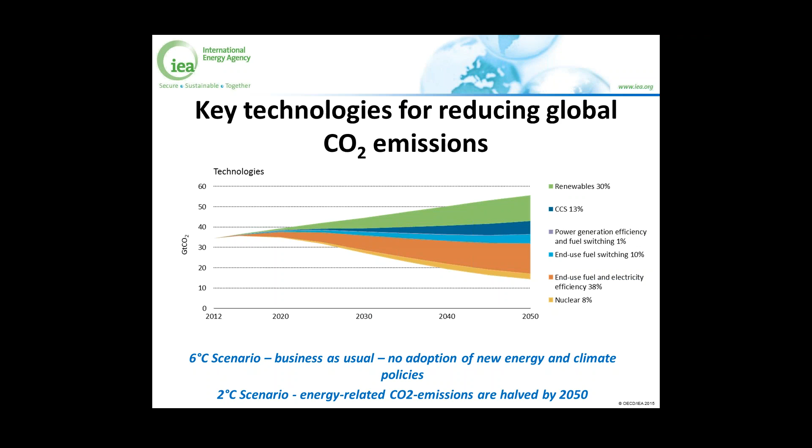For this, we have a kind of standardized IEA roadmap process. We normally start with engaging stakeholders to get the expertise we might not have, which we acquire during the roadmap process. Then we identify a baseline: where is the technology today, what are today's costs, what are today's efficiencies? Then we establish a vision: what is the deployment path needed to achieve the 2050 goals outlined in the ETP scenarios? And then we identify technical, regulatory, policy, financial, and public acceptance barriers which need to be tackled. Finally, we provide some action items for stakeholders to overcome those barriers.

So now I'm actually starting with providing you much more insights from our analysis.

First some remarks. Hydrogen fuel cells are a very broad topic. It covers energy supply and different energy demand sectors. It includes a lot of technologies and applications. And actually the benefits of hydrogen and fuel cell technologies can only be evaluated from an integrated point of view.

I can already say with certitude that we won't have the time to cover all this in the webinar. So that's why I'll pick some of the most interesting applications which we think offer the greatest value proposition of hydrogen and fuel cell applications. And I'll use these examples to sketch the most important barriers, as well as the actions which can be taken to overcome these barriers.

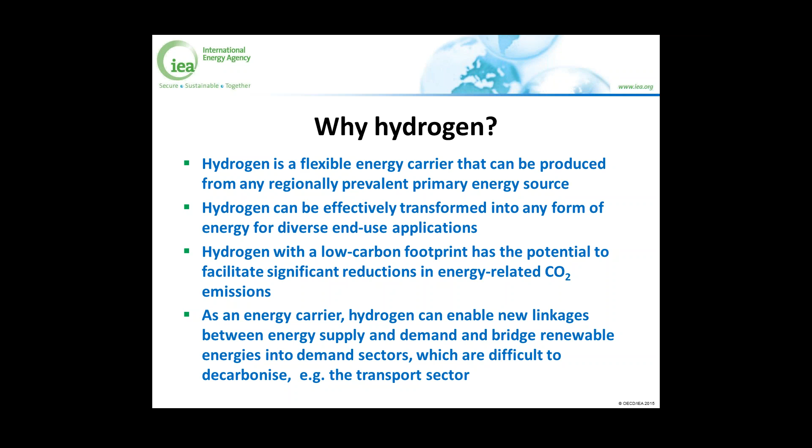But in addition, hydrogen can enable new linkages between energy supply and demand, and bridge renewable energies into demand sectors which are actually difficult to decarbonize, for example the transport sector. So as I just said, hydrogen can facilitate the deployment of low carbon energy.

In such a 2-degree scenario, in such a 2-degree world, energy supply needs to rely on variable renewables to a large extent. And this also means that supply cannot be modulated that easily to follow energy demand, because wind and sun cannot be controlled. But this also means that in turn, such a low carbon energy system is much less flexible.

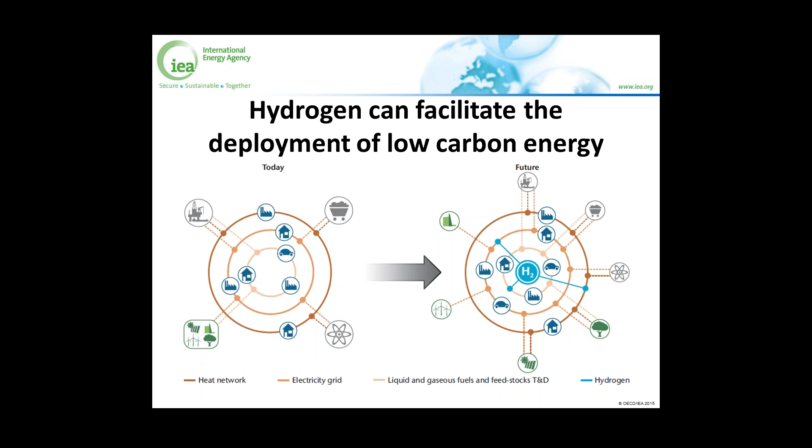One of the key aspects is that hydrogen is an energy carrier which can store low carbon footprint energy. This characteristic of being able to store low carbon energy at a sufficient energy density, for example, to make it possible to have a 500 or 600 kilometer range with a fuel cell electric vehicle, is something very special, and this makes it pretty unique compared to electricity.

Small quantities of hydrogen can be stored under weight and space requirement, and large quantities of hydrogen can be stored over long periods of time. This could facilitate the integration of very large shares of variable renewable energies into the energy system.

In addition to this, hydrogen could also be used as a feedstock. This is how hydrogen is used mainly today - not as an energy carrier, but as a feedstock. Hydrogen will also be demanded in the future as a feedstock, for example in the refining industry, especially against the background of diminishing oil quality. Much more hydrogen will be needed to actually produce the high quality fuels which we demand.

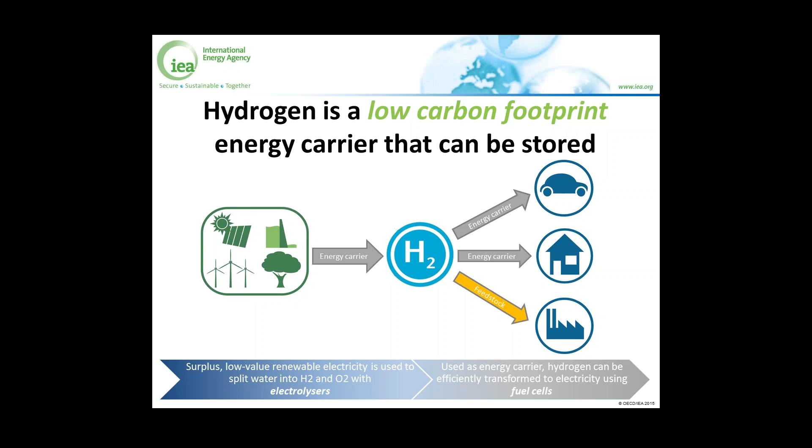Now we'll have a look at some more concrete applications. For this we will start with hydrogen and fuel cell technologies in transport.

So basically, in the transport sector, there are 3 technological options to decarbonize individual motorized transport from a technology perspective. You can have battery electric vehicles and the direct use of low carbon electricity. You can have hybrid vehicles and plug-in hybrids in combination with the use of liquid fuels which have a high blend share of sustainable biofuels. Or, finally, you could use fuel cell electric vehicles and hydrogen.

Each of these technology options has its specific advantages and disadvantages. For example, battery electric vehicles are much likely to be always restricted in terms of range. And even if the range could be enhanced substantially, there's still the barrier of how to get the electricity into the battery and what time this would need. So recharging time is actually a serious issue.

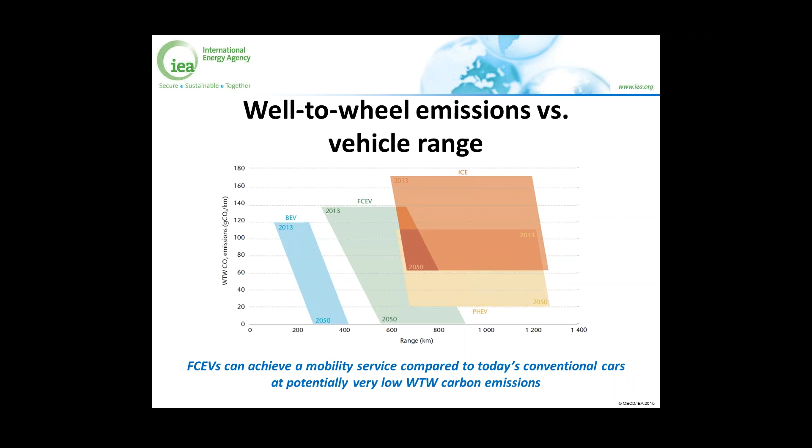Which is why we were looking into some more detail in the transport sector. We were investigating the effect of a much more intensified use of fuel cell electric vehicles on energy use, emissions, and costs. So we developed a variant of our normal 2-degree scenario, which is the 2-degree high hydrogen scenario.

EU4 is a little bit an artifact, due to our aggregation of regions already in the model. So EU4 comprises France, Germany, Italy, and the UK. Why are we looking at these 3 regions only? Because if you want to seriously investigate hydrogen in transport, you need to introduce some spatial resolution in models, and this is always very complicated.

Therefore, we decided to focus on the key regions where we already see today a lot of hydrogen development, which doesn't mean that there aren't other regions which also develop a lot of fuel cell and hydrogen technologies, namely Korea, and other countries in Europe not comprised in this EU4 region.

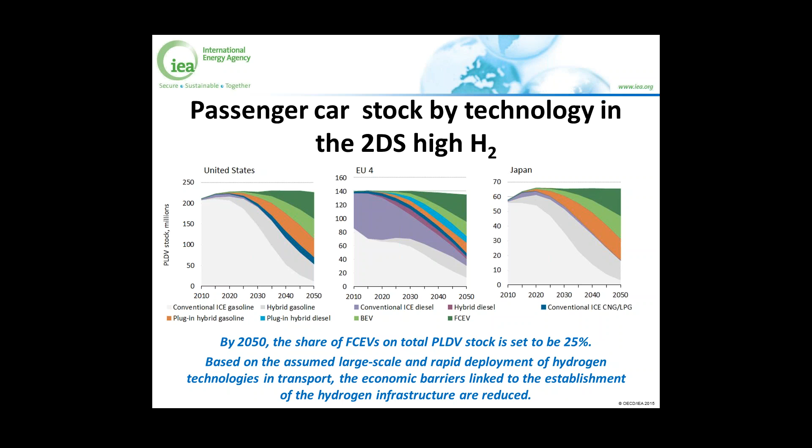In ETP, we use the avoid, shift, improve concept to build our 2-degree scenario for transport. Avoiding transport means the transport activity is reduced, which can be achieved for example by better urban planning. Shifting transport means transport demand is shifted to more efficient modes, for example individual motorized transport shifted to rail or bus.

And finally, improving transport technologies includes the deployment of high-efficient conventional vehicles, the uptake of alternative powertrains, for example fuel cell electric vehicles, and also switching to alternative fuels like biofuels.

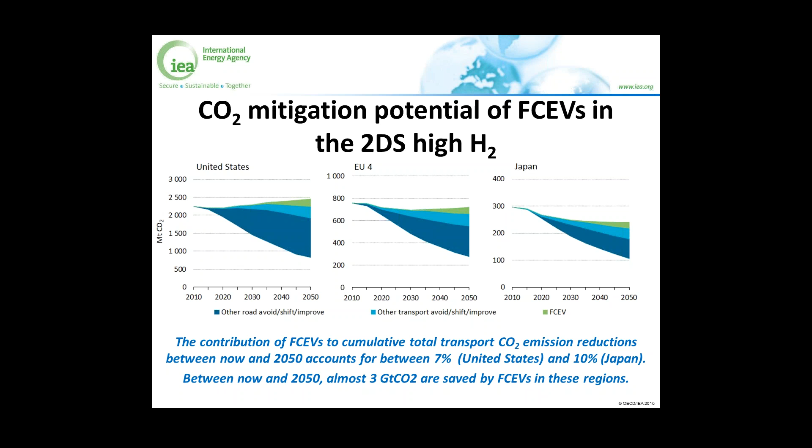This actually sounds not that much, but you need to take into account that we are talking about the whole transport sector — shipping, aviation, rail, and road. So achieving a 10% contribution to the total emission reduction is actually quite a large share. In total, this translates to almost 3 gigatons of CO2, which could be saved by fuel cell electric vehicles between now and 2050.

This sounds all wonderful, but why don't we have fuel cell electric vehicles then? On the one side, fuel cell electric vehicles are still pretty expensive, and so far only very few models are available on the market.

On the other side, the absence of the hydrogen generation, transmission, distribution, and retail network is an important barrier. To really make fuel cell electric vehicles an option, large amounts of infrastructure need to be built from scratch — thousands of stations, thousands of kilometers of pipelines, and a lot of trucks to distribute the hydrogen from the production site to the demand side.

In addition to this, there's also some uncertainty. Will fuel cell electric vehicles be accepted by the market, and how fast can the market actually ramp up? Especially in this nexus between building up the infrastructure and rolling out the vehicles, this uncertainty plays quite a crucial role. Let's look at the example of such a hydrogen refueling station.

What this stylized graph is showing is the cumulative cash flow curve of a hydrogen station over time.

What you see is that over a pretty long time, there might be negative cash flow. This negative cash flow is caused by actually pretty expensive equipment and low utilization in the very beginning. These are actually the two main barriers.

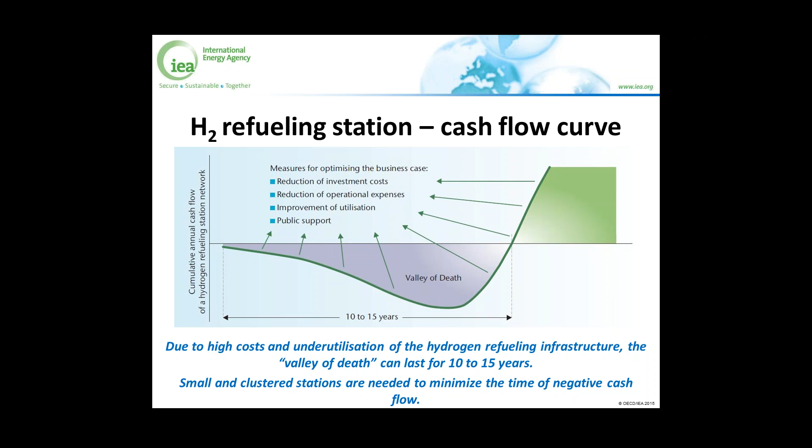Which is the theme of our next slide. So smart planning is not sufficient to make fuel cell electric vehicles an attractive option to the consumer. The rollout of this new technology would need proactive intervention.

So what we are actually doing is trying to estimate the amount of, let's call it subsidies, which would be necessary to make fuel cell electric vehicles cost competitive with efficient gasoline cars. This is also very important to note: it needs to be compared to efficient gasoline cars. We need to stay in one and the same scenario. The efficient gasoline cars in 2050 will not be the gasoline car of today.

So therefore, we were basically calculating total costs of driving. The total cost of driving comprises the investment cost of the vehicle plus the lifetime fuel cost of the vehicle, and this is all normalized to the lifetime mileage of the vehicle. So basically, we get a US dollar cent value per kilometer.

And we were comparing these total costs of driving with conventional but efficient gasoline vehicles. Then we were calculating the amount of money which would be needed to make fuel cell electric vehicles cost competitive with efficient gasoline vehicles. So basically, on this economic metric, you can compare the economic feasibility or economic performance of different technology options.

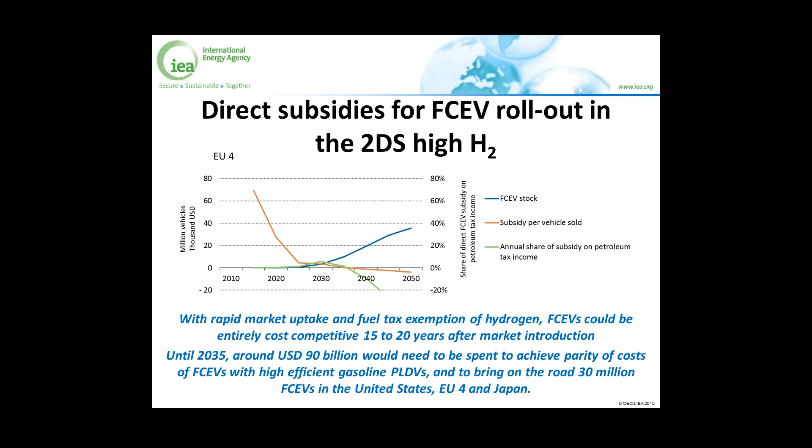That's it so far for our transport results, and now I'm talking a little more about hydrogen and fuel cells for variable renewable energy integration.

In our 2-degree scenario, the decarbonization of the power sector is one of the main pillars to achieve the 2-degree target. So until 2050, global average carbon intensity of power needs to drop to around 40 grams of CO2 per kilowatt hour, from around 530 grams of CO2 per kilowatt hour today. So we really need a massive decarbonization of the power sector.

But this also means that the share of variable renewable power in the electricity mix needs to reach up to almost 45% in some regions, for example, in the EU.

As power supply and demand needs to be balanced instantaneously and everywhere in the power grid, this high share of variable renewable penetration might result in significant temporal and geographical imbalances between power supply and demand. This might result in significant amounts of renewable power being curtailed, because if renewable power cannot be absorbed by the power grid, then normally the wind farm will just be switched off.

So this high penetration of variable renewable power in the electricity mix could also be a source of a significant amount of electricity which could come at low price. But it's important to note we are talking about the price—the surplus renewable electricity has a very low market value, but it is produced at the same cost. So this is not free electricity, it is just low-value electricity.

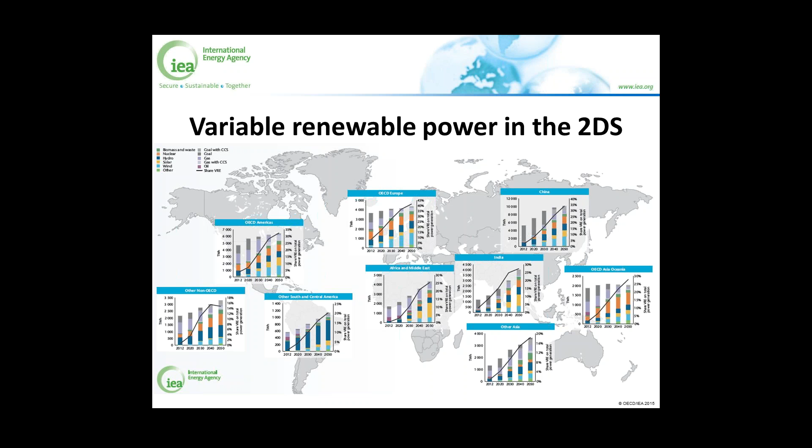Now, hydrogen-based systems could actually establish new energy vectors to integrate surplus variable renewable power into the energy system—or reintroduce it, maybe that's the better term. We can call these power-to-X trajectories. These trajectories comprise power-to-power: renewable electricity is transformed into hydrogen via electrolysis.

It is stored, or can be stored, and then retransformed to electricity via fuel cells. This way, large amounts of renewable power could be stored.

We also have the power-to-gas trajectory: renewable power is transformed into hydrogen, which is then mixed with natural gas—this is what we call blending—or transformed into synthetic methane with the help of a methanation process. This way, renewable hydrogen could be integrated into already existing transmission and distribution infrastructure, the natural gas grid, which already exists in a lot of countries, and it can also be used with existing end-use conversion technologies such as gas turbines, for example, for power generation.

And then, as a third trajectory, we look into the power-to-fuel trajectory. Renewable electricity is transformed into hydrogen and then sold as a transport fuel to be used in fuel cell electric vehicles. What is important to note, and this is the main content of this slide—

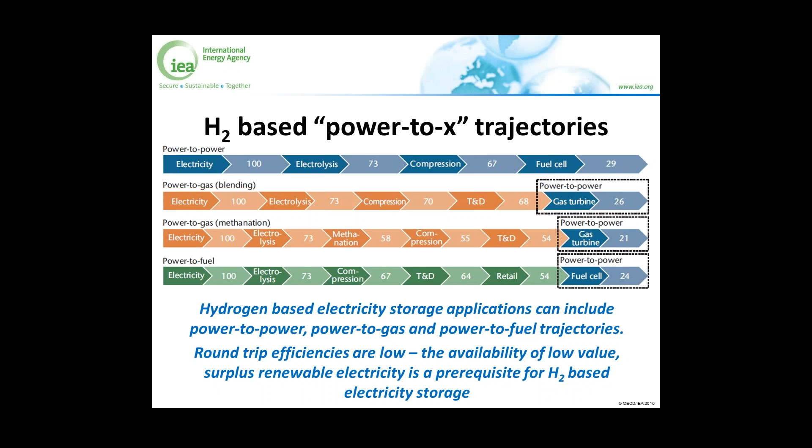And to make it even more complicated, you actually need some kind of spatial resolution to account for, let's say, transmission grid bottlenecks and stuff like this. So this is a very difficult task, and I try to formulate this in this roadmap: without a robust quantification of this potential of surplus electricity, it is very hard to discuss hydrogen technologies.

We were looking a little bit into the electricity storage potential in the 2-degree scenario. Why are we doing this? Because power-to-power storage systems would be a means to store electricity, and electricity storage is already used today.

Our estimates with our modeling tools come to the result that by 2050, in a 2-degree scenario, this electricity storage capacity might be quadrupled. It's important to note that this might be a conservative estimate, because our modeling approach only captures time-wise mismatch, not geographical mismatch. These geographical bottlenecks, the transmission line bottlenecks, might be very important when evaluating the need for electricity storage.

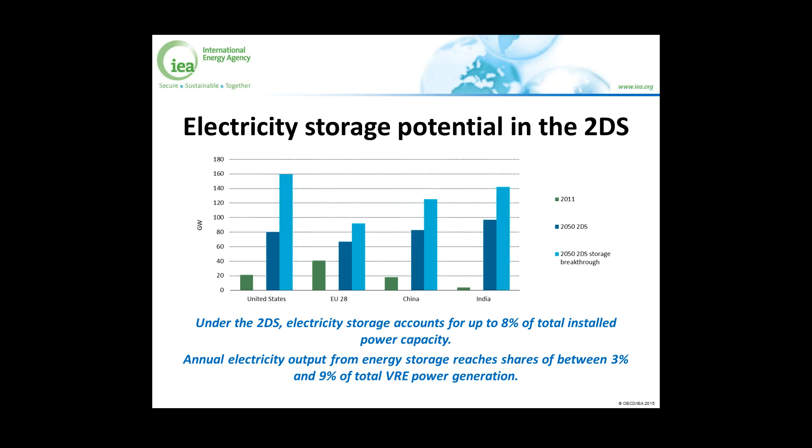Discharge duration can be in the region of seconds and minutes if you're talking about voltage regulation, but it can also comprise storage for weeks or even seasons. Here we are talking about large-scale, long-term energy storage.

Hydrogen could possibly find its place within large-scale, long-term energy storage applications. In fact, it might be the only storage option which could provide acceptable levelized costs of electricity if we look at large-scale and long-term energy storage.

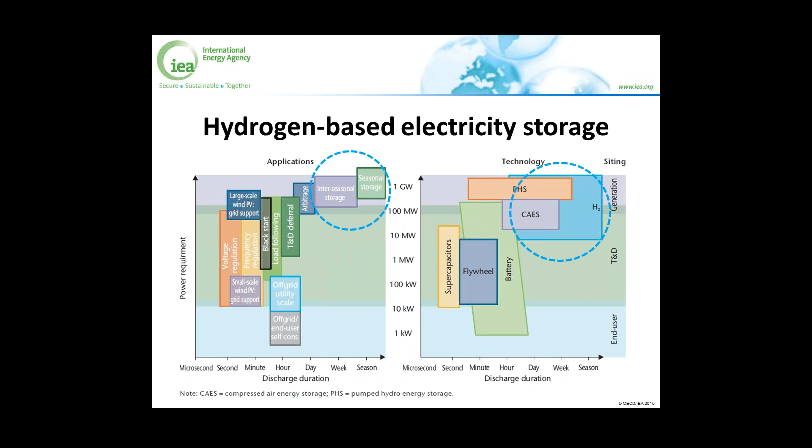All these large-scale, long-term energy storage systems suffer from very low annual utilization rates. Pumped hydro, but also compressed air storage, are looking not so promising here. Because hydrogen is much more energy dense than these two competitors, hydrogen might really be the option to cover this segment.

Finally, we wanted to know what hydrogen-based renewable power integration pathway could offer the highest value proposition. Is it power to power? Would it be power to gas or power to fuel? What we were doing here was calculating the marginal abatement costs of these three options.

It looks like in the more distant future, the power to fuel pathway achieves the lowest marginal abatement costs, getting as low as $20 per ton of CO2 to $150 per ton of CO2. This is mainly due to the fact that the transport sector is difficult to decarbonize, and all other decarbonization options are expensive as well. Plus, if fuel cell electric vehicles are produced at large scale, there seems to be huge potential for cost reductions for fuel cells. This is why, in this comparison, the power to fuel option seems most promising.

If we look at power to power, it seems like this technology could also become an attractive decarbonization option. Our calculated marginal abatement costs are in the range of $100 to $200 per ton of CO2. Given that we have around $150 per ton of CO2 in our ETP model in the 2-degree scenario by 2050, the power-to-power storage option could actually also be interesting.

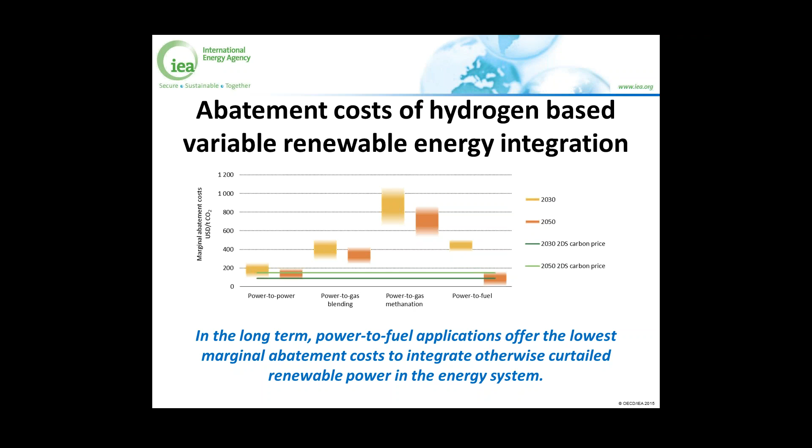I'll say some very few words about hydrogen and fuel cell technology in industry and buildings. Basically, low carbon hydrogen can be a means to reduce upstream emissions in liquid fuel production processes, as I already said at the beginning. In the steel industry, the more efficient use of hydrogen has the potential to contribute to significant CO2 emission reductions.

It can also play an enabling role for the application of CCS technologies. The use of renewable hydrogen in industry hinges upon its economic competitiveness, particularly when compared to hydrogen from natural gas steam methane reformation with carbon capture and storage. In the building sector, natural gas-fueled fuel cell micro-CHP systems could help increase efficiency, but they struggle with costs. So there are opportunities in industry and buildings, but we do not expect them to be the main driver for hydrogen and fuel cell development.

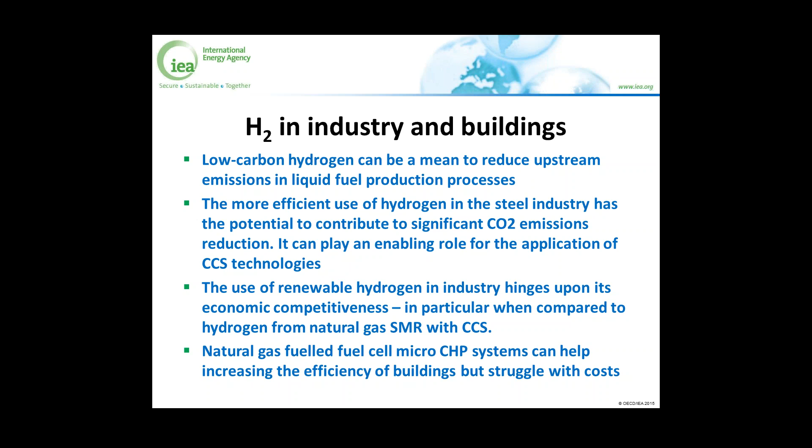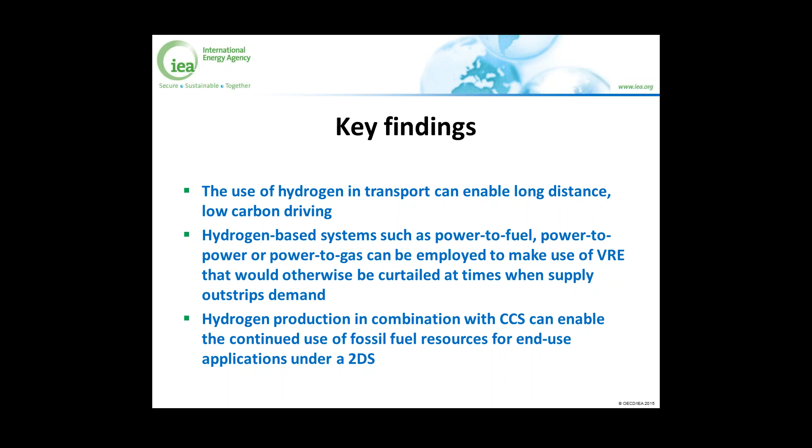So what are our key findings? The use of hydrogen in transport can enable long-distance and low-carbon driving. Hydrogen-based systems such as power-to-fuel, power-to-gas, or power-to-power can be employed to make use of variable renewable energy integration, and can be used to reintegrate otherwise curtailed renewable energies. Hydrogen production in combination with CCS can enable the continued use of fossil resources for end-use applications under a 2-degree scenario. So hydrogen can play a pivotal role based on its flexibility with regard to generation and conservation.

The use of hydrogen is most valuable if it's based on hydrogen's ability to store low-carbon energy. If these two things come together, we think hydrogen could help reduce carbon emissions in energy sectors which are difficult to decarbonize. We have some transport-specific results. A 25% share of fuel cell electric vehicles by 2050 could contribute 10% to all total cumulative transport-related carbon emission reductions to achieve the 2DS scenario. Assuming a fast ramp-up of fuel cell electric vehicles, a self-sustaining market could be achieved 15 to 20 years after the introduction of the first 10,000 fuel cell electric vehicles. And the development of the hydrogen infrastructure is costly - we're talking about something between $900 and $1,900 per vehicle for each of the 150 million vehicles sold between now and then in our 2-degree scenario.

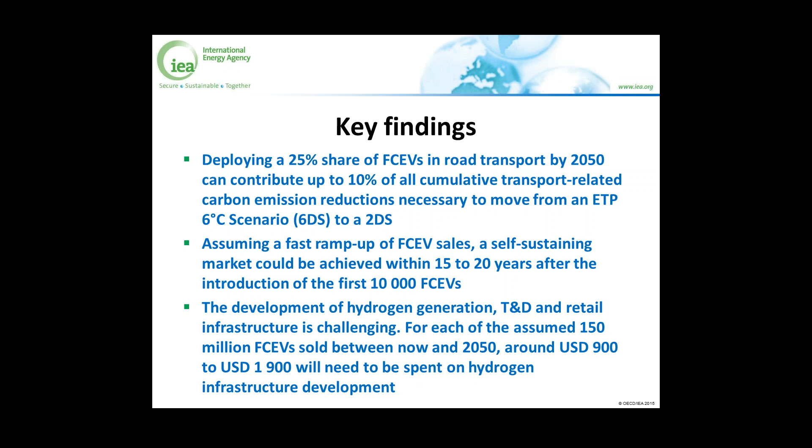So what are the concrete steps for the next 10 years? If hydrogen technologies are to play a significant role, we need a strong will to tackle climate change. Hydrogen technologies seem to make most sense against the application of climate mitigation policies. Hydrogen and fuel cell technologies will benefit from technology-neutral and climate-focused policies such as carbon pricing, stringent and long-term fuel economy standards, or zero-emission vehicle mandates.

But still, there are cost barriers, and these cost barriers, especially in the early phase, need to be overcome by specific policies which stimulate investment and early market development, deployment of hydrogen and fuel cell technologies, as well as the needed infrastructure. This, as lined out in our transport results, could comprise something like the exemption of hydrogen from fuel taxation, or even direct subsidies to a certain technology, in this case fuel cell electric vehicles.

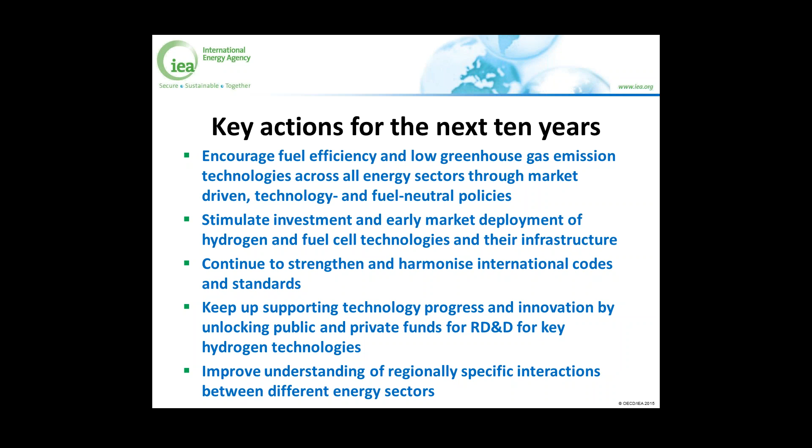Of course, the continued development of codes and standards plays a vital role. Sustained public support, but also the unlocking of private funds for further RD&D is a key element of such a policy portfolio. And finally, a generally deeper understanding of the dynamics within the energy system is key to evaluate the potential of hydrogen and fuel cell technologies. So we need to improve our tools to better understand where the role of hydrogen could actually be.

We also have some concrete key actions for the next 10 years. If fuel cell electric vehicles are to play a major role in the future, we think it would be necessary to put the first 10,000 fuel cell electric vehicles on the road, alongside hydrogen generation, transmission, and distribution infrastructure, including at least 500 to 1,000 stations.

It is also important to engage all international stakeholders from relevant industry, as well as regional, national, and local authorities in developing risk mitigation strategies for infrastructure rollout. This is really something very important - those stakeholders need to work towards a common goal. Otherwise, I think it will be very difficult for hydrogen technologies to really achieve significant shares.

And of course, with respect to variable renewable integration, and also with respect to power to gas, regulatory frameworks are important. These frameworks must be set up in a way that barriers for grid access are removed for storage technologies. For example, it could be exempt from grid transmission fees, but also there need to be some upper limits or common understanding on how to blend hydrogen into natural gas and still ensure a continuous quality of natural gas.

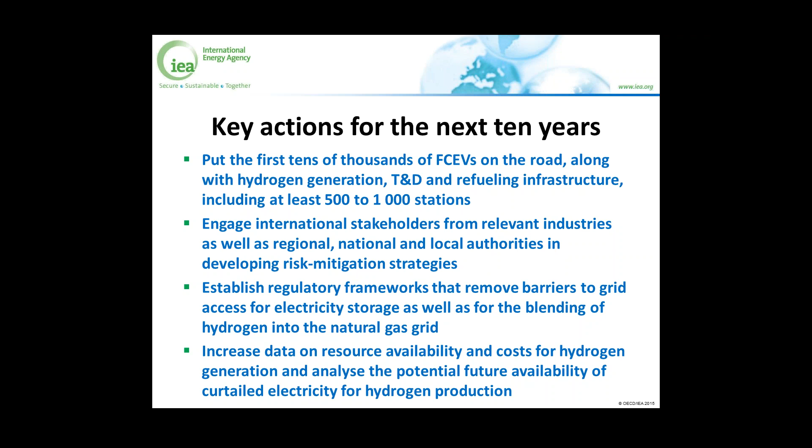Last but not least, increasing the data on resource availability to produce renewable hydrogen is a key element. We need better tools to quantify the possible surplus electricity or curtailed electricity in energy systems with very high renewable share. I think that's it so far. Thank you very much.